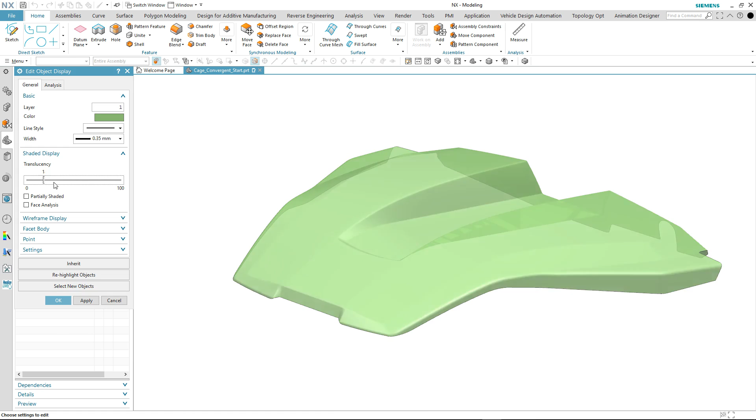So in the graphics window you can see a convergent body of a vehicle hood, and we've already started to reconstruct this mesh body using some of the new commands in this release of NX. As you can see, we have a subdivision body followed by some other child features. What I'd like to do is to take you through the process of getting to this stage.

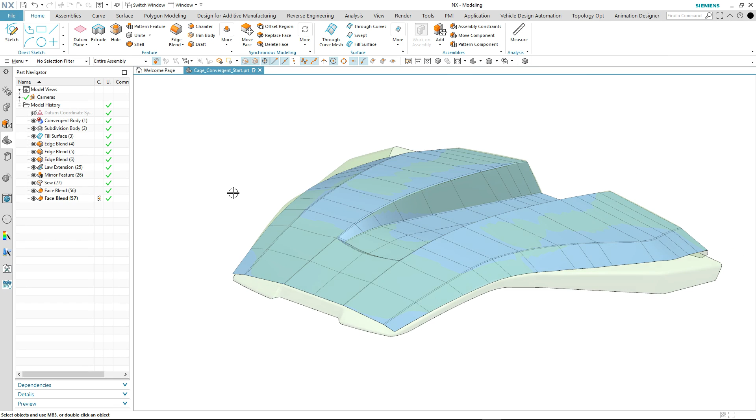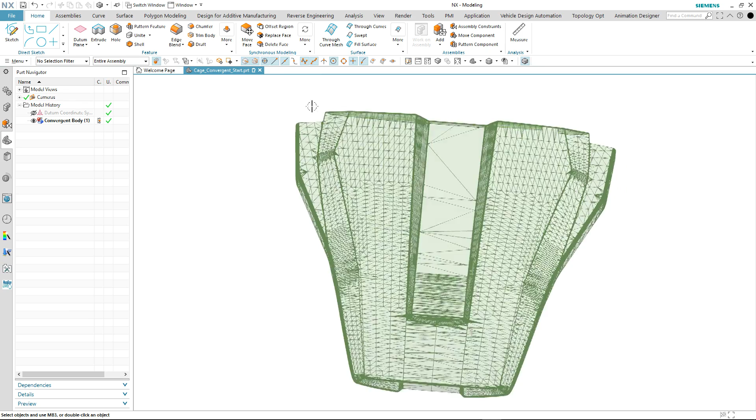So here we have our original convergent body, and for ease of selection during this whole subdivision sheet body creation, I'm going to make the body itself translucent and then show the facet edges. You can see the makeup of this mesh body.

I'll activate Realize Shape and then select the new command, Draw Cage. And it's as easy as this, just to start selecting geometry directly on the mesh body, whether that be a facet vertex, point on face, point on edge. And you can see how quick it is to develop these quad shapes. It's using the previous quad shape as the starting point for the next one.

So you can very quickly reconstruct surface geometry directly from referenced scan data. And the result is a single subdivision body. I can also use any of the other NX Realize Shape commands, such as Transform Cage, to make subtle adjustments to the subdivision body I've just created.

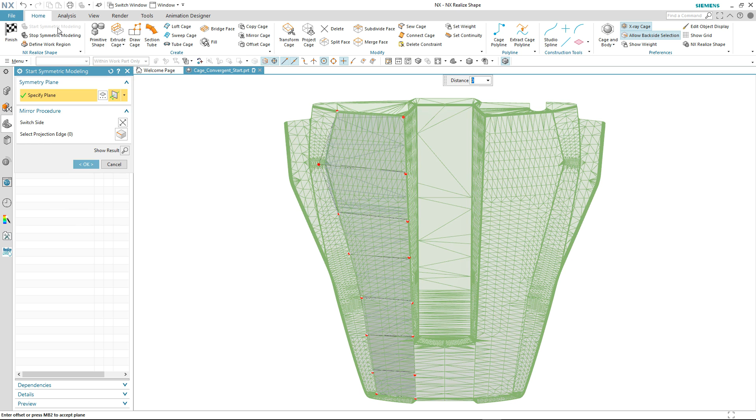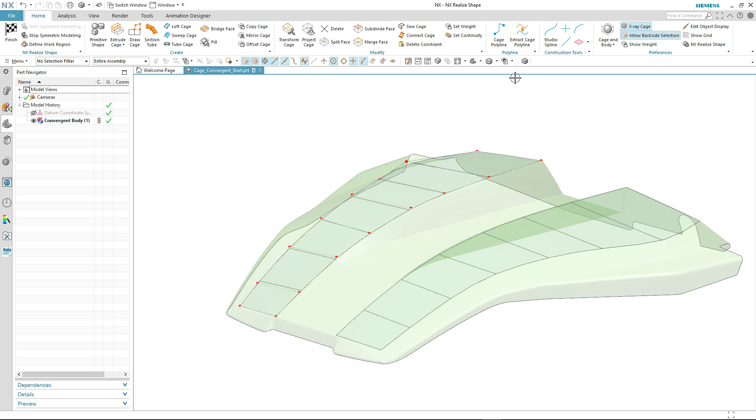Now, as this hood has symmetry, I'm going to use symmetric modeling. Now I have both sides of my design created, although I only have to make modifications to the one half for it to affect the other. Notice if I switch off the facet edges and also the convergent body, that the subdivision sheet bodies follow the shape of my convergent body.

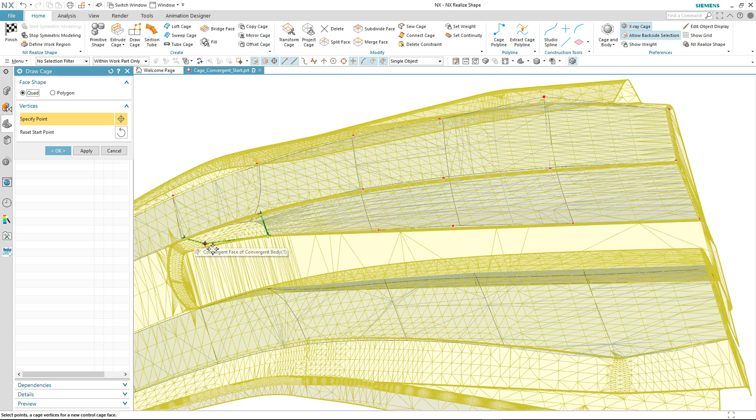I'll now continue with my design, and I'm going to do this center wall that runs down each side of the model. So I reselect my original cage and then start to continue constructing the geometry. As you can see, with symmetrical modeling, both sides of the design are being updated simultaneously. You can really see how quick it is to construct geometry using this technique.

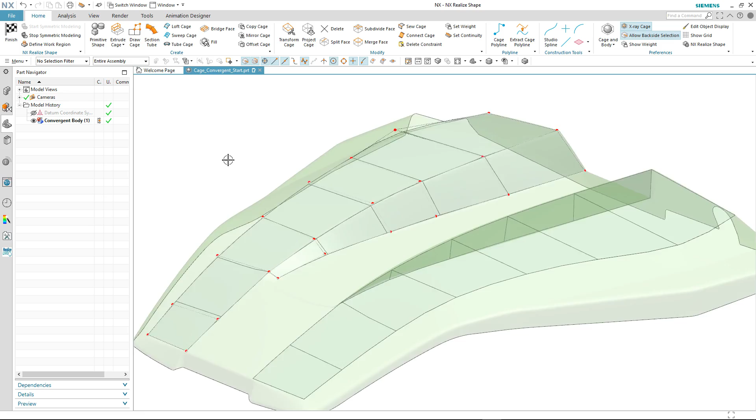I can continue to further refine the design. In this case, I'm going to set the continuity to match the sharp edge of our original mesh body, and it's as simple as that. I continue to make modifications to the reconstructed surfaces using common NX Realize Shape commands.

We'll just modify the cage using a transform, and then again we'll just split that cage up so we can just move the edge in the valley a little closer to our original design.

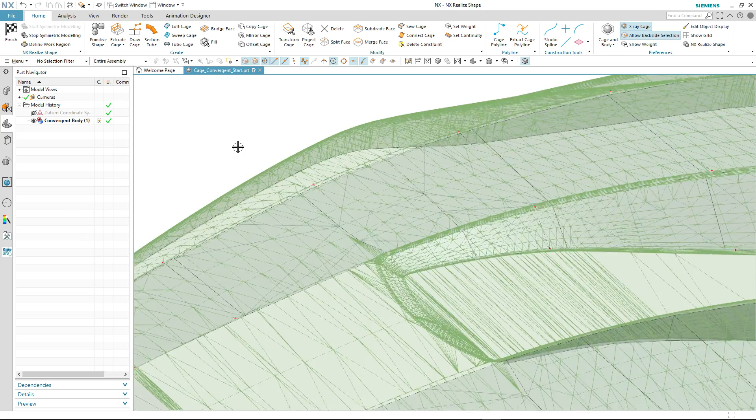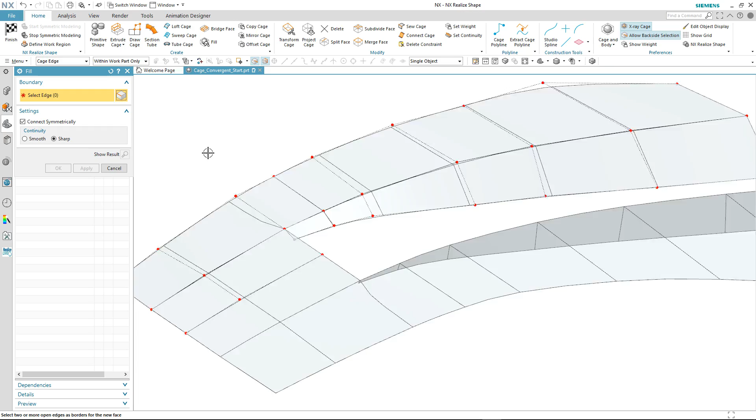So let's take a better look at what we've got so far. We'll just switch off the convergent body and you can see what we've constructed in our design so far. We'll continue to add subdivision bodies, this time using a slightly different command, which allows us to fill geometry across the center line.

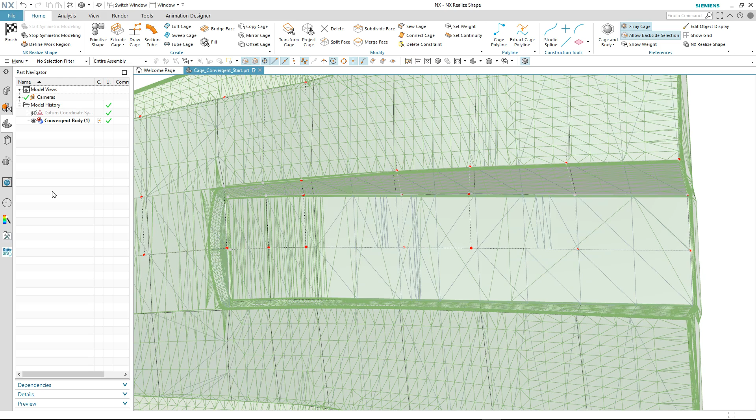And again, similarly in the valley, very quick and very easy using the tools in Realize Shape, especially with the inclusion of the new Draw Cage command, which allows us to lay subdivision surfaces extremely quickly onto existing geometry, in this case a convergent body.

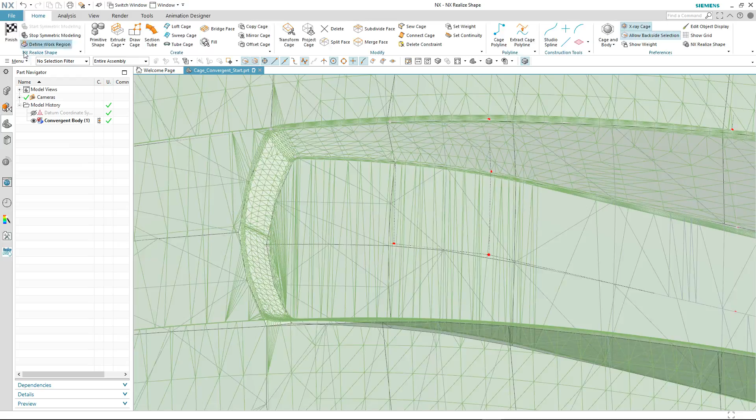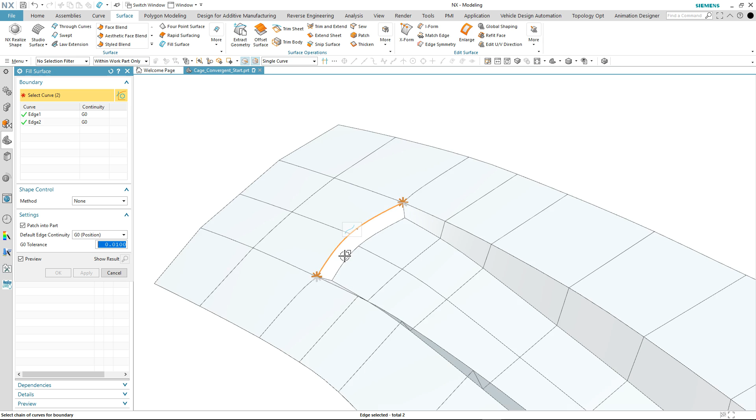I continue to make modifications to the subdivision bodies so that I can create what I need to generate the angled wall between the valley and the front of the hood. So I'm going to isolate the subdivision body, and now I'm going to concentrate on creating that walled face, and I'm going to use the fill surface to do this, and I just very quickly select the boundary and the surface is created.

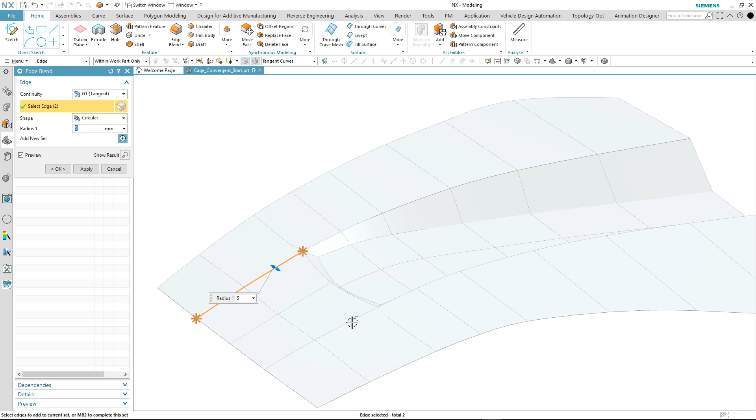So you've seen me use a number of different tools and techniques to get to this stage of the design. Just going to finish off this section with adding some of the finer detail, such as the fillets or blends across the model. Again, we're just using standard NX modeling blends to do this. And then we'll run the final two blends around the top of the valley and the base of the valley.

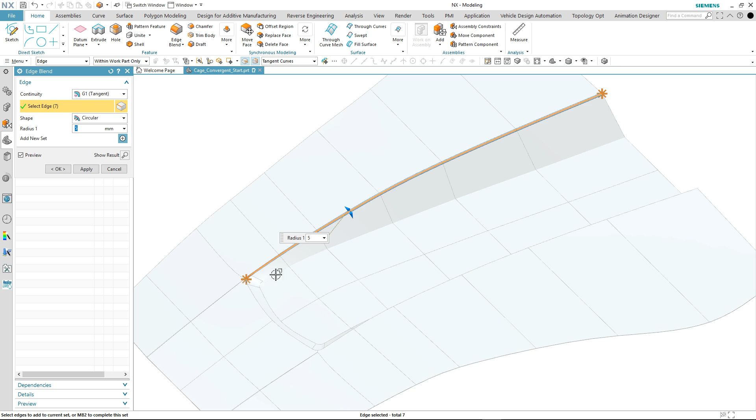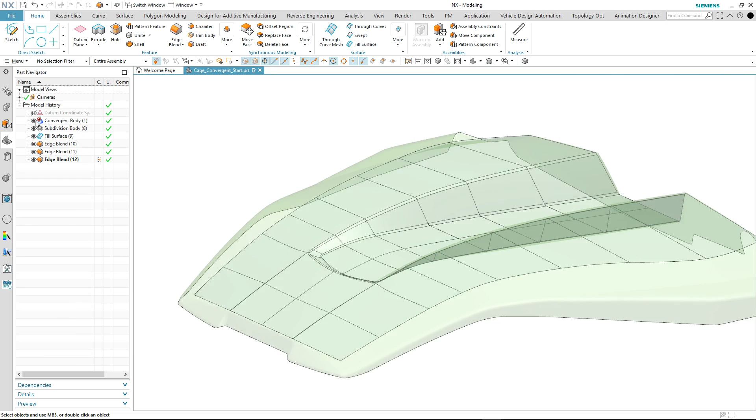And there we have our design. At this stage, you can see how it follows our original convergent body. Obviously, we would need to continue adding more features, but you can see how quickly we were able to get to this stage utilizing not only traditional modeling techniques, but also the new Draw Cage command.